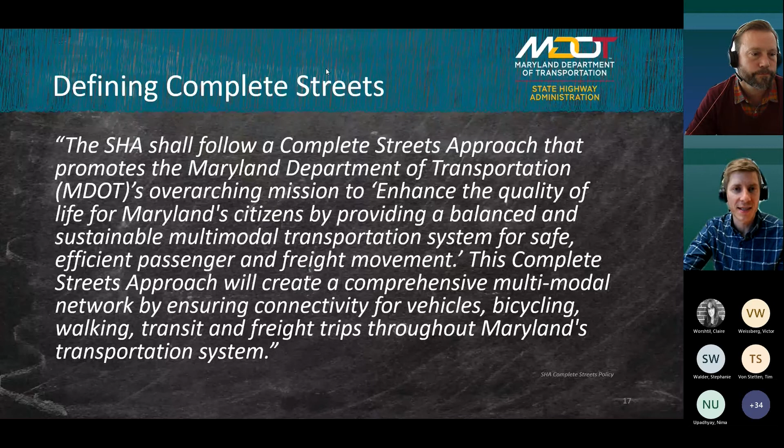Moving into the Maryland Code here, maybe because this is a little more legalistic, has a lot more exceptions and wiggle room. A complete streets policy adopted in accordance with this section shall, there's the strong language again, be implemented with the objective of creating a comprehensive, integrated, and connected transportation network that allows users to choose among different modes of transportation. So that's great, but not specifying which modes of transportation. Ensure that all users are considered during the planning, design, construction, and reconstruction phases of facility. So really nice that they specified the activities, but 'are considered' is not as strong as the specific actions that will be taken for those users.

Benefit all users equitably to the extent feasible while taking into consideration the needs of the most underinvested and underserved communities. That's a great equity piece.

When practicable, require the accommodation of other modes of transportation. That 'when practicable' is a big out that allows some wiggle room. 'Extent feasible' in the prior one was too—sorry, just wanted to pull that out. Yep, thanks for keeping me honest. Recognize that all facilities are different and user needs should be balanced to ensure community enhancement. That is some helpful flexibility.

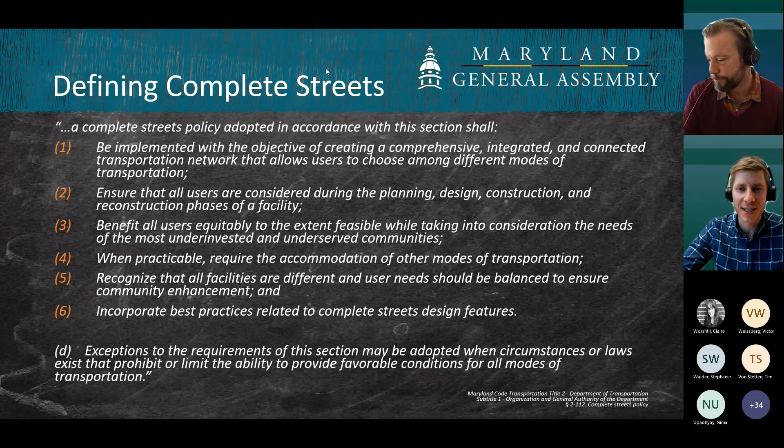And then incorporate best practices related to complete streets design features. This is not the entire section, but this is the key language. At the bottom, note that exceptions may be adopted when circumstances or laws exist. So certainly laws are important—you can't do anything that's not legal—but circumstances are pretty open to interpretation. So this leaves a lot of flexibility and wiggle room too.

Getting a little more local, this is the Plan 2035 Prince George's. This is the definition of complete streets that was included in that 2014 document. I won't read this entire one out loud, but this is a bit more descriptive about what complete streets are, and not specific to how they should be implemented, but does include a lot of the key elements: sidewalks, bike lanes, special bus lanes, giving lots of illustrative examples of what a complete street can be.

And then getting a little more specific still, the Prince George's County Code requires that all planned, county-financed, and approved road, sidewalk, trail, and transit related construction and reconstruction projects shall include environmental, site design, and facilities for the combined use of motor, emergency, and freight vehicles, transit, bicycles, and pedestrians. So once again, very strong—shall include these facilities—and specifies specifically the users that are to be accommodated.

But as we continue, here are those exceptions again. Except when cost shall be disproportionate to the projected need, or when such facilities would be inappropriate due to the nature of the project, including the context and character of the surrounding built and natural environment of the neighborhood or area. So again, here's some of that language that gives some wiggle room.

Matthew, I don't know if you had any other thoughts on that. No, I think the point from earlier is just this sort of reinforces it. Okay, thanks.

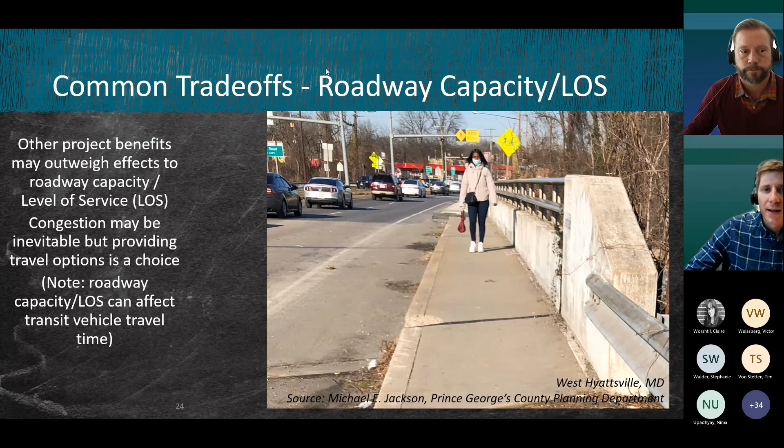Also thinking about person mobility: level of service typically measures how well cars can move along corridors and intersections, but it's also important to think about person mobility and the trade-offs in providing space for pedestrians to navigate intersections and roadways. This often becomes an issue when repurposing travel lanes, reconfiguring intersections, or even adjusting signal operations.

Signal operations are often optimized to reduce vehicle delay as much as possible, but it's important to also think about the other users at the intersection and consider total person delay, not just total vehicular delay.

That can be a useful argument when thinking about whether data on the users of the facility can help make these changes, or whether there's a more policy-driven argument that pedestrians simply need to be accommodated comfortably at the intersection as a matter of course.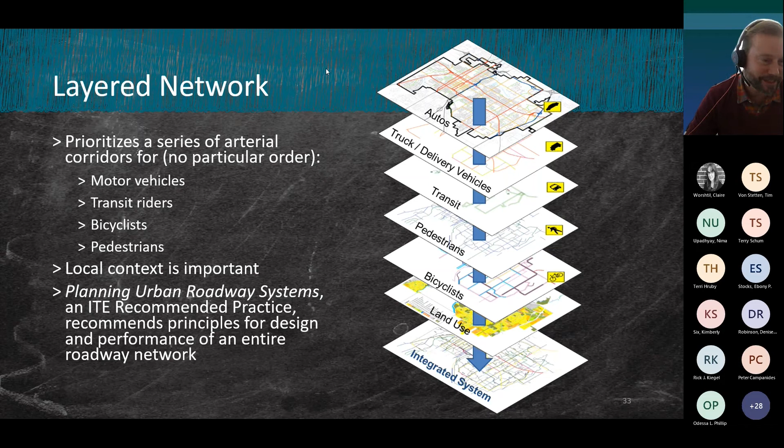I do want to make a point that Michael made with me, which I appreciate, which is just that you shouldn't use layered networks as an opportunity not to accommodate all modes. There is a need to accommodate all modes on all streets. It's really just about point of emphasis, or maybe even sort of tiebreakers in terms of which modes get the highest accommodation given different contexts.

So I'll walk through an example in Westminster, California, and there's a series of these slides. The key thing to look at is that there is a street, and what we're showing here is the bicycle and pedestrian priority network. So this is just one layer. All the green facilities are the bike and ped priority areas. There's a street going north-south, right in the center of this page, and you can see that it has bike and ped accommodations on it.

And Alex, if you go to the next slide, you can see that same street does not have automobile priority accommodations. That is, the automobile priority is accomplished on the two parallel streets on the east and west of it. And so that's a good example of, is there a comment or question?

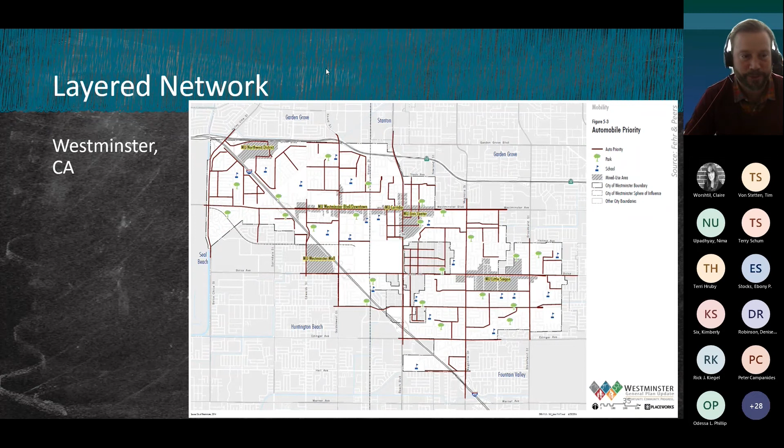That's a good example of separating modes. And then it allows you to build essentially world-class facilities for bikes and peds on that bike ped street, and presumably accommodate auto movements more efficiently on the adjacent streets as well.

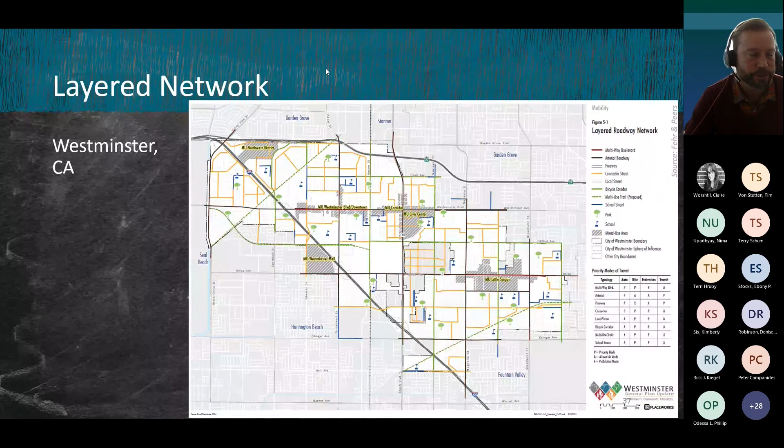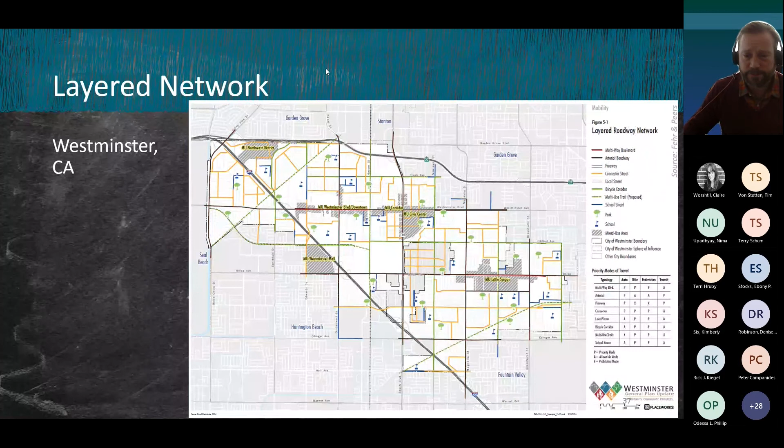And then I think the other piece of this that Alex will get into later is doing an analysis of how the recommended improvements affect those modes. So one of the really great things about being specific around modal priorities is that it allows you to sync up your performance measures. So if you have a street that is a transit priority street, then your performance measures for assessing how that street is performing should be based on transit criteria, things like level of amenities, or maybe transit travel times and reliability, but it allows you to sync those things up.

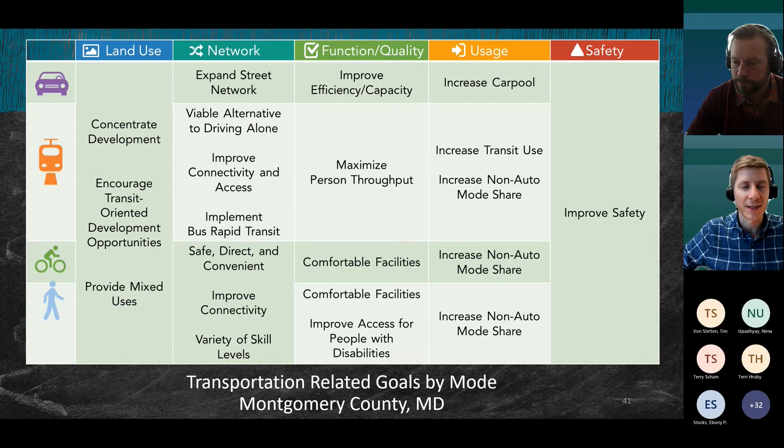So we took a lot of the goals and objectives stated in some of their existing planning documents and arrayed them on a matrix, with modes down the left side: vehicle, transit, bicycle, and pedestrian. And across the top, the different elements of a transportation network: land use and context, the network itself and how it's connected, the function and quality of how it's performing and the user experience, the level of use, and safety as an important consideration.

As we went through their planning documents and noted the kinds of goals and objectives they had, we found a pretty comprehensive set of goals across all of these modes and all of these functions.

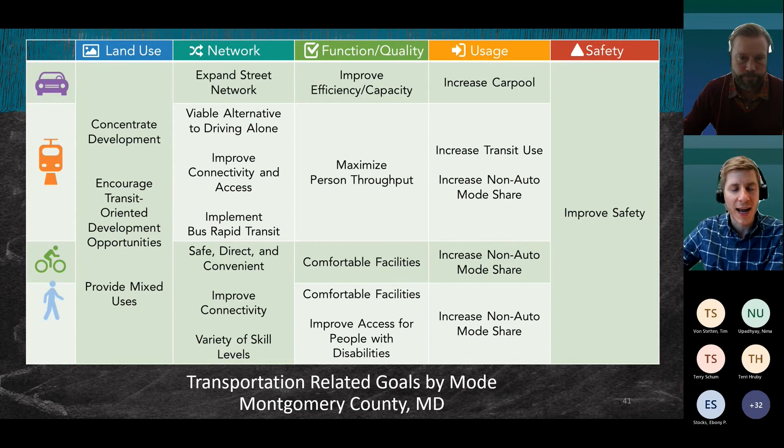For auto, most of their measures performed pretty well. They didn't really have anything to talk about vehicle network connectivity, although generally in most places in the United States today, there's pretty good auto network connectivity to just about anywhere you want to go.

But for the other modes, for transit, bicycle, and pedestrian, the metrics did not perform as well. So we went back to the drawing board and thought about the different metrics we could use that would address each of these intersections of the transportation network functions and then also the modes.

That resulted in four broad categories: accessibility, traveler experience, intersection performance, and activity. This required a little bit of realignment, but then we identified measures that addressed all of those.

So thinking about accessibility to different locations, jobs, overall person trips, and looking at those by mode - auto, transit, bicycle and pedestrian - how long those trips took and how easily you could access the transit system itself. Traveler experience covers the frequency and span of transit service, how reliable the vehicular network was, and then bicyclist and pedestrian comfort, which I'll go into in more detail in a moment.

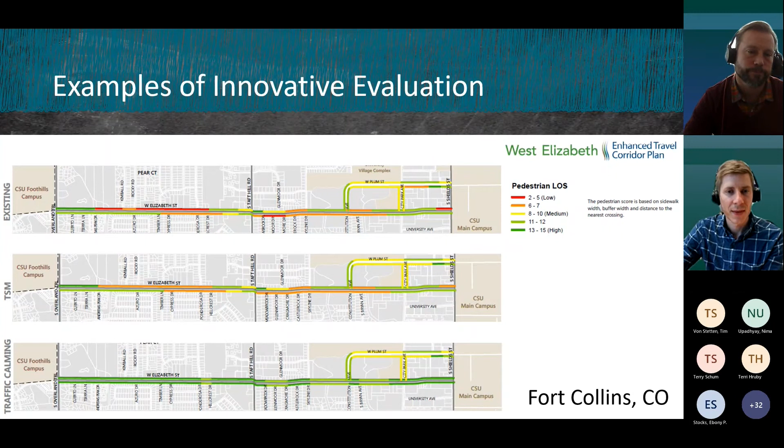One other example I wanted to share was just thinking about any of these performance measures and the way that they affect different groups differently.

And so we used that concept to compare outcomes for folks who were living in these areas of concentrated low income and minority population versus other locations that don't have those concentrations, and did find that residents who were living in those equity emphasis areas would be exposed to much more congested vehicle miles of travel, and along with that comes poorer air quality and increased exposure to collisions. Residents of those locations would experience much more exposure than those living in the non-equity emphasis areas.

So this kind of stratification can be done with just about any performance measure that has a spatial component, so anything that could be divided by a traffic analysis zone or other census geography, to see how those outcomes would affect different groups.

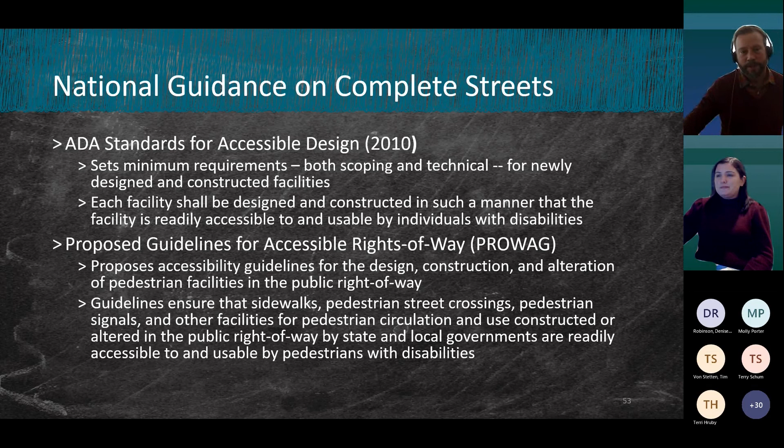The most recent evolution relative to Maryland and Prince George's County is what SHA is doing. This year they published Context Driven, sort of SHA's shot at something akin to what Florida had, defining what contexts are and what types of treatments are appropriate within those contexts. I think it's a huge step forward - it's a great document and website, so I'd recommend you take a look at it.

In parallel to that, they're doing a Pedestrian Safety Action Plan, which was just published. The first priority list of action locations was published just a month or two ago - great progress. And like the Florida guide, it's a little more visual. If you go to the next slide, it has different context zones all the way from urban center to rural.

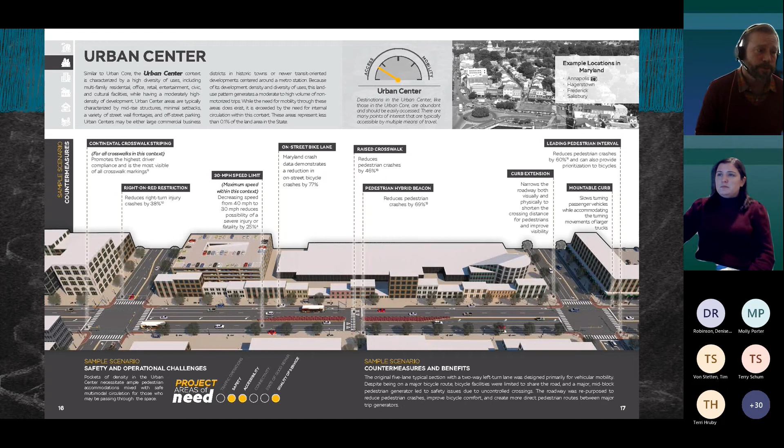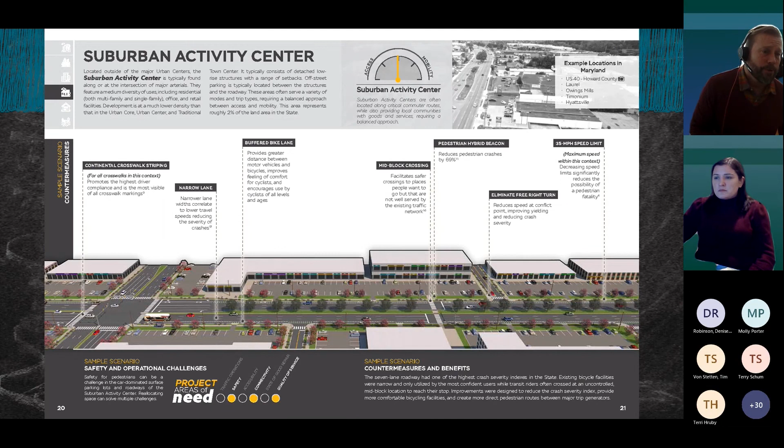You'll note the number of callout boxes for special accommodations, whether for bikes, peds, transit, or streetscape environment - there are a lot more callouts for those treatments in urban centers. As you step closer into more auto-centric areas, the number of those accommodations goes down. It's really helpful for level-setting on what types of treatments should be present in each context. SHA is also doing its first application of this.

So we've been working with RK&K, who's also part of this team, on developing the Maryland 185 and 187 context definitions, applying context-driven design to those corridors. I'll describe 185 to you, which is Connecticut Avenue north of Chevy Chase Circle.

That section is 6 lanes wide with a small median, and the lanes are 9.5 feet wide. One key thing we've tried to figure out is how to best apply context-driven design. We really relied on crash data to help us decide whether to reconfigure that, and developed a recommendation of converting that 6-lane section to a 5-lane section with buffered bike lanes, driven by the strong history of rear-end and right-angle collisions, both a product of not having protected left turn pockets along most of the corridor, which makes people make ill-advised decisions about when to turn, and other vehicles stopping in the through lane trying to turn, with others smashing into their back.

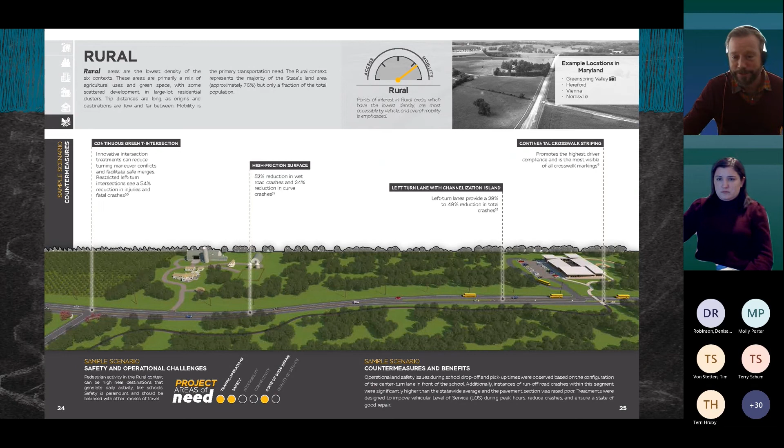So I think Maryland is in a great spot in terms of a lot of progress of late, but still finding its legs in terms of how to best apply all these new tools. But it's an exciting time in Maryland. So that's the historical concept construct. With that, I'll turn it over to Anjali, who's going to talk first about pedestrians.

Yeah, thanks, Matthew. So we're going to start getting into some roadway design concepts. In this section, we'll cover design parameters by mode, and we'll talk about roadway design as well as intersection design and different types of intersection control treatments. Later on, Alex and Matthew will go into detail on streetscape design and curbside management.

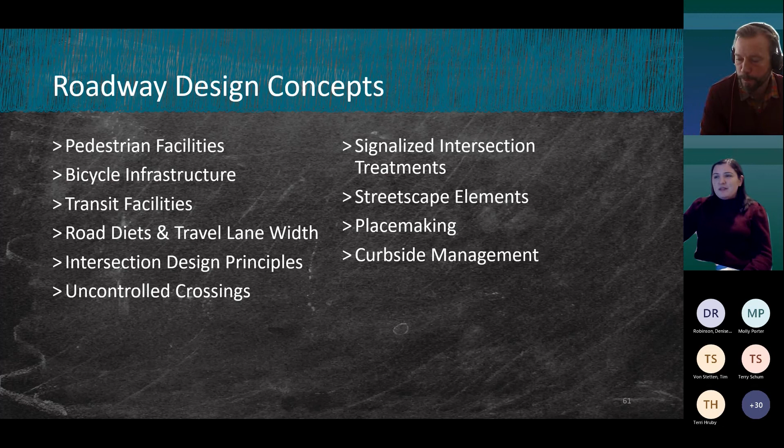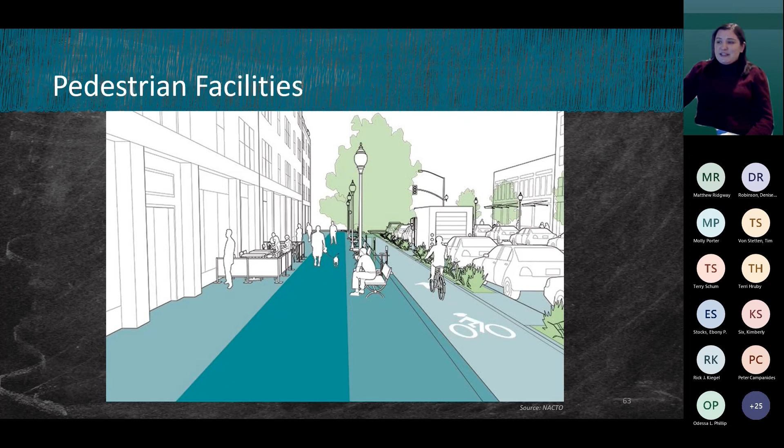It's important to note that DPW&T does have specifications for pedestrian facilities within the county. Design width is defined as extending from the curb or planting strip to any buildings or landscaping that form the opposite borders of the sidewalk. DPW&T specifies about a 5-foot minimum sidewalk width along arterial, collector, and industrial roadways.

The minimum clearance width is the narrowest point on the sidewalk, and this inaccessible minimum width is created when obstacles like utility poles protrude into the sidewalk and reduce the design width. Larger design widths can accommodate more pedestrians and therefore improve ease of access.

There are also specifications on maximum grade, defined as a limited section of path that exceeds the average grade. In the pedestrian environment, the maximum grade could be measured over 2-foot intervals, which is the approximate length of a wheelchair wheelbase or a single walking pace.

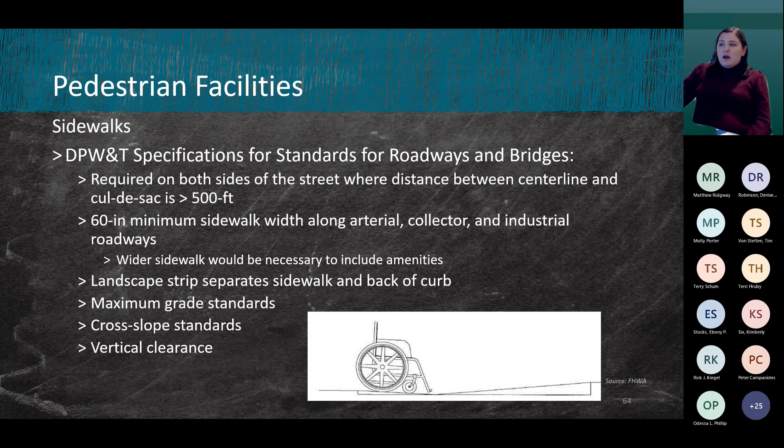Next, DPW&T's Urban Street Design Standards apply in more dense and urban areas of the county. This guide specifies a minimum sidewalk width of 8 feet, although the minimum can vary depending on the scale of development and street typology, keeping in mind that greater widths provide greater accessibility. When designing these facilities, street furniture, signs, utilities, and poles should all be placed outside of the clear width zone of a sidewalk, and the minimum width may not be enough to satisfy actual need, so additional width might be necessary to improve comfort for pedestrians.

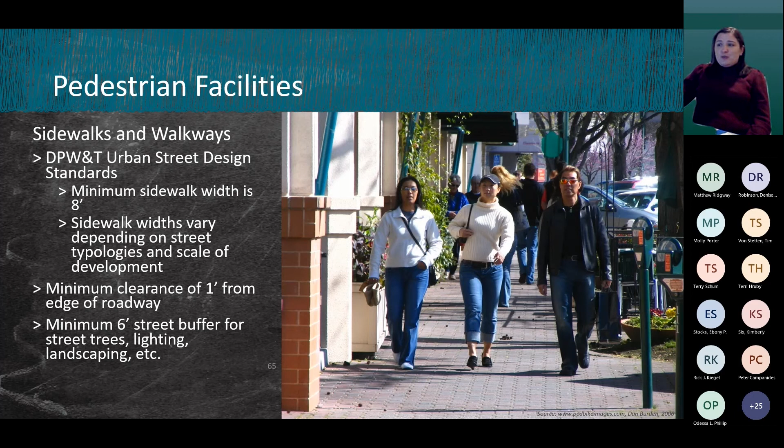Moving on to bicyclists and bicycle infrastructure. It's important to remember that bicyclists generally have the same rights and duties as motorists, which means designing for them is similar and based on the same fundamentals of transportation engineering. Some differences are that bicyclists have lower speeds and acceleration capabilities, and greater sensitivity to direction of travel and steep uphill grades.

Generally, bicycle travel can be enhanced by bikeways or improvements to the right-hand portion of roadways where bicyclists are required to travel, and when feasible, providing a wider shoulder than the minimum width can be considered. Bicycle travel can also be enhanced with appropriate signage and short-term and long-term parking facilities.

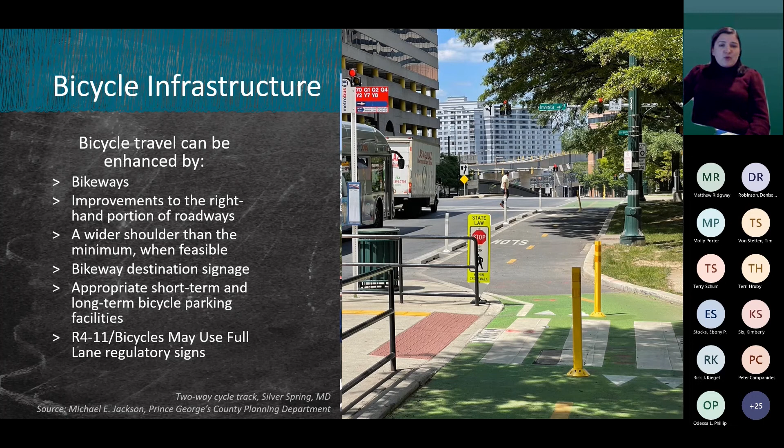Thinking more about bicycle parking, short-term bike parking can be convenient and easy to use, while long-term bike parking should emphasize secure and sheltered access. When designating space for bike parking, you want to consider the locations, the security, the quantity, and the density.

Next, looking at local parking requirements: Prince George's County does have requirements for bicycle parking that specify the number of spaces required and provide high-level guidance on design. It's important to note that new requirements are scheduled to go into effect in April of next year that include more detailed space requirements depending on land use, and more detailed bike rack and locker requirements as well.

Getting into the design of different facility types for bicycle infrastructure, first we have the bike path. When designing a separated bike path, design considerations should include exclusive use by bicyclists and in some cases pedestrians. If regular pedestrian use is anticipated, separate facilities for pedestrians might be beneficial to minimize conflicts, so it's important to understand whether there's opportunity for a separate facility or not.

It's important to remember that sidewalks are not considered bike paths, but where you're providing a bike path with no adjacent adequate pedestrian facility, and the bike path will be available for pedestrians, that means the facility should also meet ADA design criteria. The minimum paved width for a two-way bike path is 8 feet, although 10 feet is preferred. For a one-way bike path, the minimum width is 5 feet. Design speed is generally about 20 miles per hour, except where there are long stretches of downgrade, in which case the design speed should be 30 miles per hour.

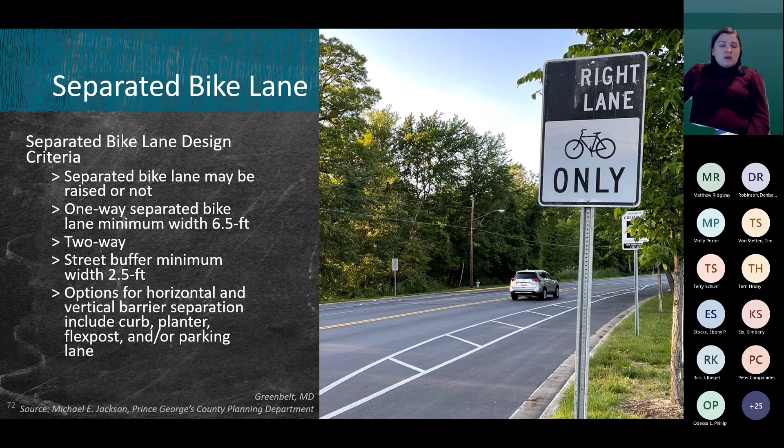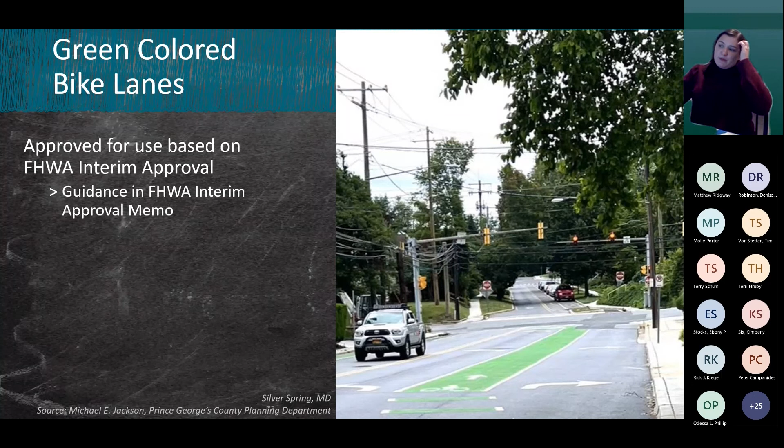If we go to the next slide, we can talk about green paint. The use of green paint or green colored bike lanes is shown here in the image from Silver Spring, and has been approved for use in the county based on FHWA's interim approval. The next slide shows green paint being used for conflict area markings and colored pavement in conflict areas. Another example here from Silver Spring has been shown to increase awareness and drivers yielding to bicyclists, so increased safety.

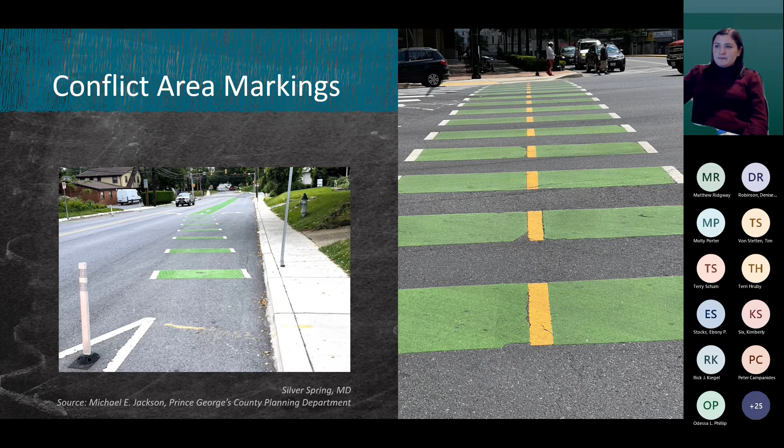Our next facility type is a bike route, and bike routes are intended to provide continuity to the bikeway system. They're typically established along through routes that are not served by bike paths or bike lanes, and they're used to connect discontinuous segments of bikeway or discontinuous segments of bike lanes. The facilities are shared with motor vehicles on the street, which are established by placing bike route signage along the roadways, and sometimes shared roadway markings are provided along the route in the street.

Since bicyclists are permitted on all highways, the decision to designate the route as a bikeway should be based on the advisability of encouraging bicycle travel on the route and other factors.

Routes should only be signed if they provide for through and direct travel in bicycle demand corridors, if they connect discontinuous segments of bike lanes, or they provide the appropriate assignment of right-of-way at intersections to give priority to bicyclists. It's important to remember that the maintenance of a bike route will be at a higher standard than that of other comparable streets.

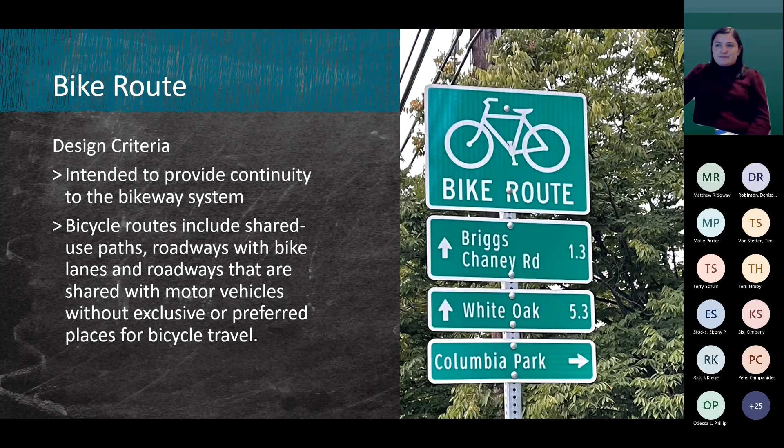On the next slide, we talk about shared lane markings, and these are used to guide bicyclists on where to ride. They can help to avoid doorings by specifying where the bicyclist should be in the lane, and they remind drivers that bikes belong.

The shared lane marking should not be used on roadways that have a speed limit above 35 miles per hour. There are, of course, exceptions where there is bicycle travel and there's no marked bike lane or shared use path, or the right-hand traffic lane is too narrow to allow vehicles to safely pass bicyclists. They should not be used in shoulders or designated bike lanes.

Our next facility type is a bike boulevard. NACTO defines a bike boulevard as a street with low vehicle volumes and speeds, designated and designed to give bicyclists a travel priority. They're basically a collection of treatments that work to achieve the goal of providing a facility that is safe and comfortable for all cycling abilities, through a combination of volume management and speed management treatments.

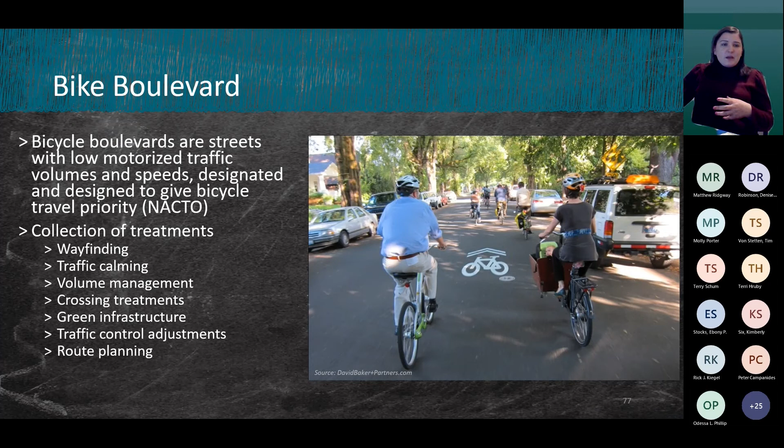On the next slide, some of the design considerations for a bike boulevard include using traffic volume management to get vehicular volumes below 3,000 vehicles per day, and using traffic calming to get speeds below 25 miles per hour. This also means evaluating traffic controls to minimize delay, providing enhanced crossings at busy streets, providing good wayfinding through signage and markings, and working with emergency responders if any speed management includes speed humps or anything like that.

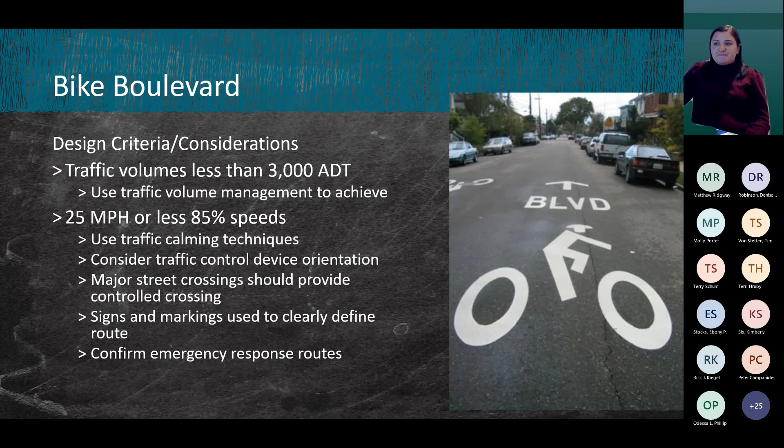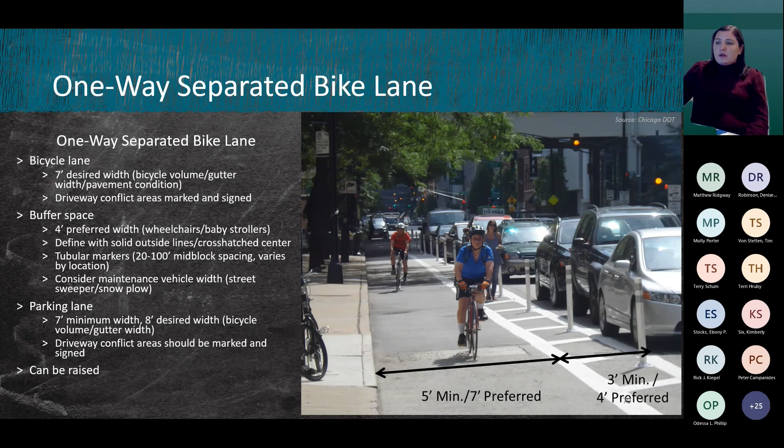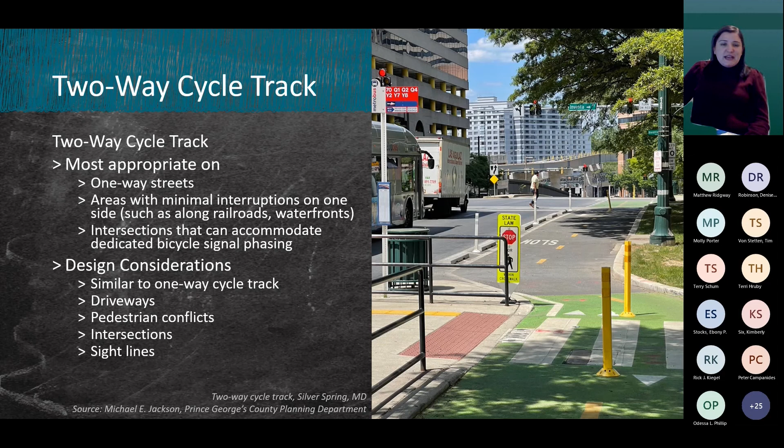Getting into some of the details of the design, the picture on the right shows this. We saw this photo earlier from Silver Spring, but this is an example of an existing two-way cycle track. At a minimum, a two-way cycle track should be 8 feet wide, while 12 feet is preferred. You want to use a dashed yellow center line to separate the bike traffic and define it as two-way. Ideally, a 4-foot buffer is provided, particularly where the facility is parking protected, and also uses raised flex posts for physical separation. Design should also implement enhanced treatments at any conflict areas like driveways.

An important consideration in designing a two-way cycle track is whether drivers and pedestrians are familiar with the facility and know to expect two-way bicycle traffic at conflict points, so that those enhanced treatments like signage and colored paint can be useful.

I mentioned the smaller footprint of a two-way cycle track, and you can think about that with a one-way bike lane. Say you have a one-way separated bike lane that designates 7 feet for the bike and a 4-foot buffer on either side of the street for a total of 22 feet in its footprint, compared to a two-way facility that provides 12 feet for the bike lane and a 4-foot buffer for a total of 16 feet. So there's that difference of 6 feet between the two options in terms of the footprint.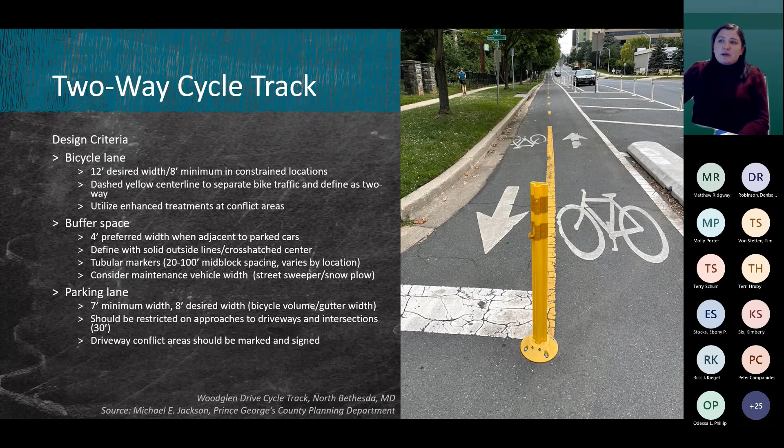Our next slide talks about contraflow bike lanes. Contraflow bike lanes designate a facility to travel in the opposite direction of the vehicle traffic. They work best on low volume residential streets with familiar drivers. This slide shows an example from Silver Spring, and you can notice the use of the double yellow to separate vehicular and bike traffic.

Important design considerations include providing a wider bike lane facility adjacent to parked vehicles and using shared lane markings in the direction of vehicular flow, where you don't have the width to have a bike lane on the other side of the street. Other design considerations include traffic diverters, which can help to either restrict vehicles or reduce the volumes when needed.

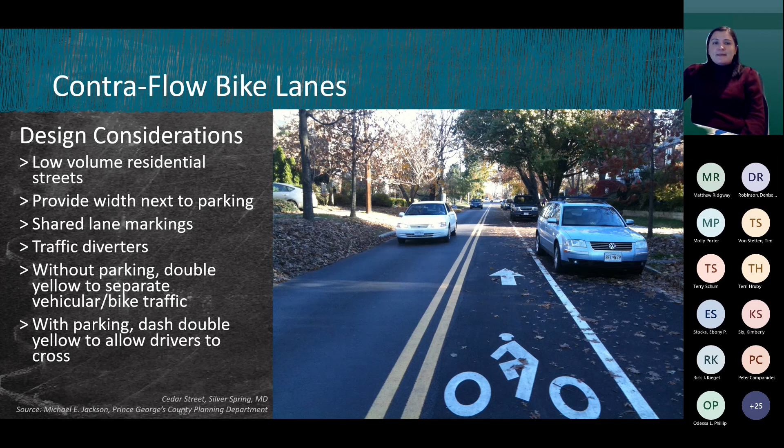On the next slide, we talk about our next facility type, which is a left side bike lane. In some cases, it's appropriate to consider bike lanes on the left side of the roadway when you have a one-way street or places with frequent bus stops or higher right turn vehicle volumes. Instances where having bicyclists on the left side could lower the risk of dooring. These are designed as conventional bike lanes with the same design guidance, just located on the left side of the roadway.

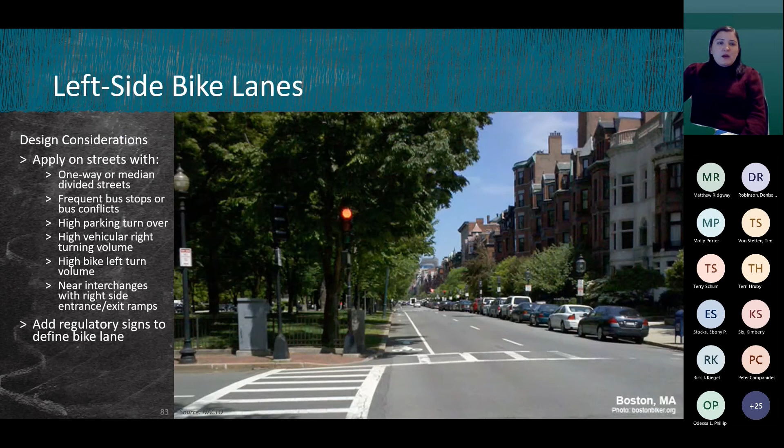On the next couple of slides, we get into some experimental designs. The photo here is of an enhanced shared lane marking, which is currently an experimental design and still needs a formal request for experimental status. FHWA will accept requests to experiment where an agency desires to deploy these for the first time. You should also consult the Maryland MUTCD for additional information on experimental traffic control devices.

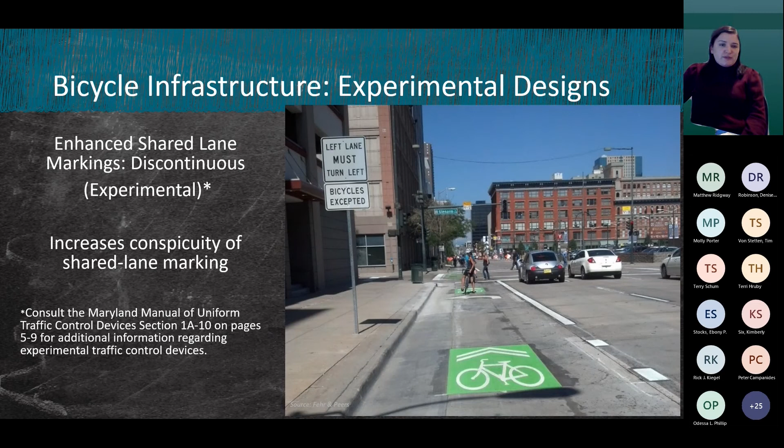On the next slide, we talk about bike boxes, which are being implemented in Maryland. You're seeing a photo here from downtown Silver Spring. They have been granted interim approval by FHWA, and they allow bicyclists to get ahead of traffic during the red signal phase. They do require a no right turn on red signage. You can see that here in the photo, and the green pavement is optional.

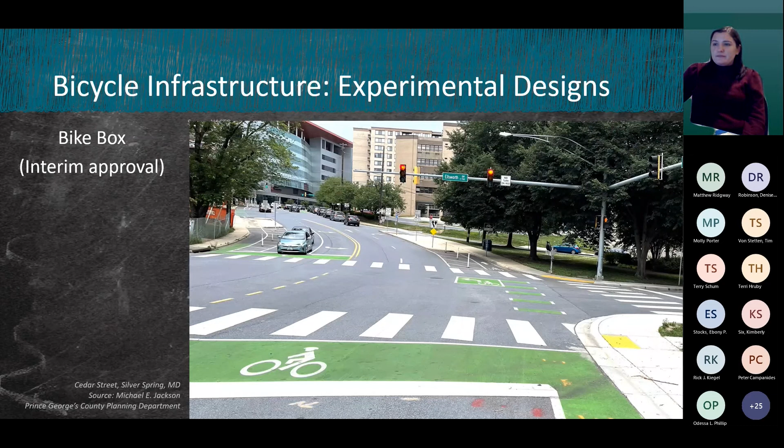The next slide talks about two-stage turn queue boxes, which have also been granted interim approval by FHWA. These require both the arrow and the bike stencil when placing them on the pavement. Similar to bike boxes, they do require the no right turn on red signage, and the green pavement is optional.

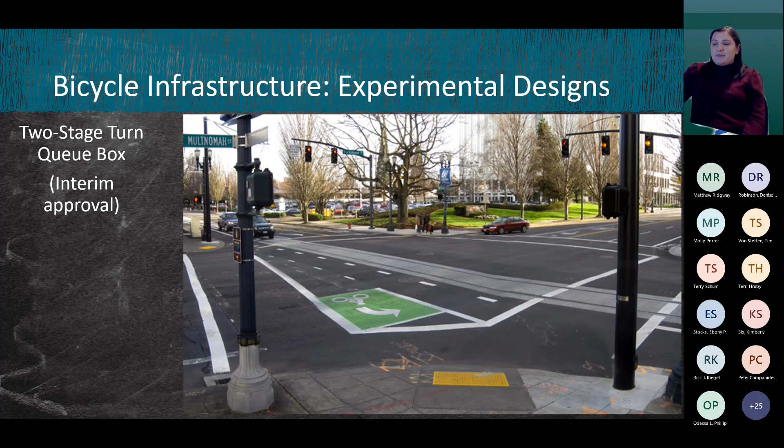So that takes us through our bicycle facilities, and next up we'll get into design of our transit facilities.

At a high level, design for transit facilities should cover 4 areas. The facility type, so some examples could include an exclusive right-of-way for something like bus rapid transit or BRT, or preferential treatment. Is there going to be transit-oriented signal timing provided on the corridor?

You also want to consider the bus zone length. One bus could require anywhere between 80 to 160 feet in length. So how many buses are you planning for in your bus zone?

Thinking about the platform geometry, typically a flat concrete pad adjacent to the roadway is provided at least 8 feet deep and 10 feet long. The platform should be able to accommodate a passenger shelter, benches, or other facilities without interfering with the pedestrian throughway on the sidewalk.

You also want to consider accessibility when designing transit facilities. Considering the curb height could be between 6 to 9 inches. If too high, a bus would be prevented from moving close to the curb and wheelchair lift operations could be impeded. And if too low or without a curb at all, elderly or mobility impaired passengers with strollers might have difficulty boarding and alighting.

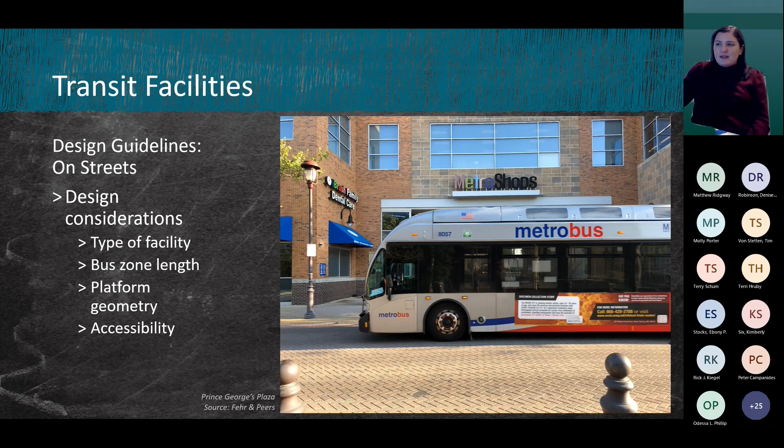Getting into some more of the details in designing transit facilities, selecting the type of application. For example, are you in a situation with high standard, high speed, 40 to 50 mile per hour multi-lane suburban roads, generally with limited access? Or are you in an environment with lower speeds, shorter blocks, and more urban streets generally found in or around centers of concentrated employment like CBD, central business districts.

You want to balance the sometimes competing requirements in these cases, including considerations for overall road efficiency and moving people, the transit operational and passenger needs, requirements for street front commercial and residential users, frequency and spacing of cross streets and traffic signals. So considerations for the alignment, frequency, span of service, and intersection treatments help achieve all the requirements for an ideal transit facility.

It's also important to consider the interaction between all the modes in the design of transit facilities. Some of those design considerations should include passenger information, how you're disseminating information to passengers in terms of real-time arrival information, as an example. What is the pedestrian access like? Are you providing bicycle parking? And what sort of fare collection system are you going to have?

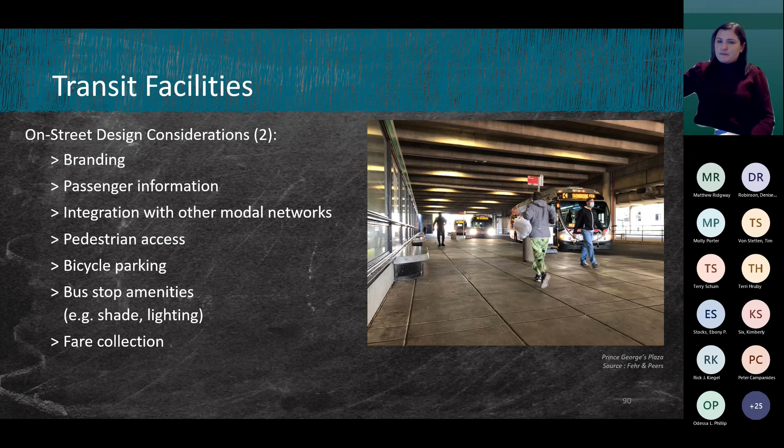There are also many trade-offs to balance in selecting bus stop location between near side or far side, right lane versus left lane. We'll discuss a few of the options, and the guide for geometric design of transit facilities on highways and streets from AASHTO is another great resource.

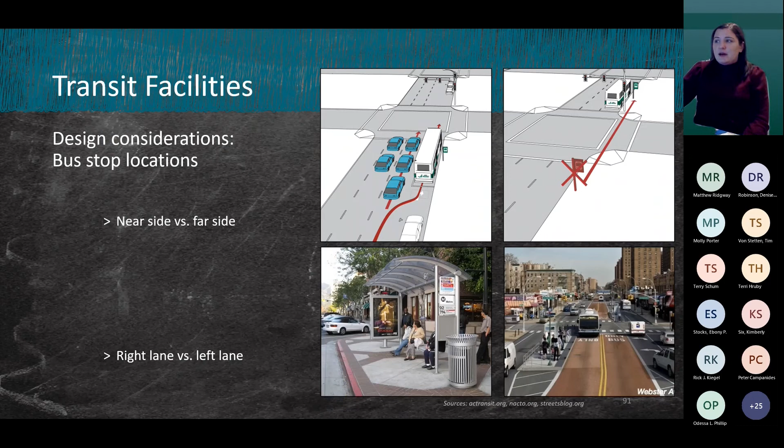First, prioritizing near side bus stop locations can have advantages such as minimizing interferences when traffic is heavy on the far side. It allows pedestrians to access buses closest to the crosswalk, could eliminate the potential of double stopping, getting through the light and waiting at the red light, getting through and then stopping on the far side. And it could also allow passengers to board and alight while the bus is stopped at the red light.

Some disadvantages of near side locations could include increasing conflicts with right turning vehicles, could block the through lane if trying to get over, and could increase sight distance problems for crossing pedestrians.

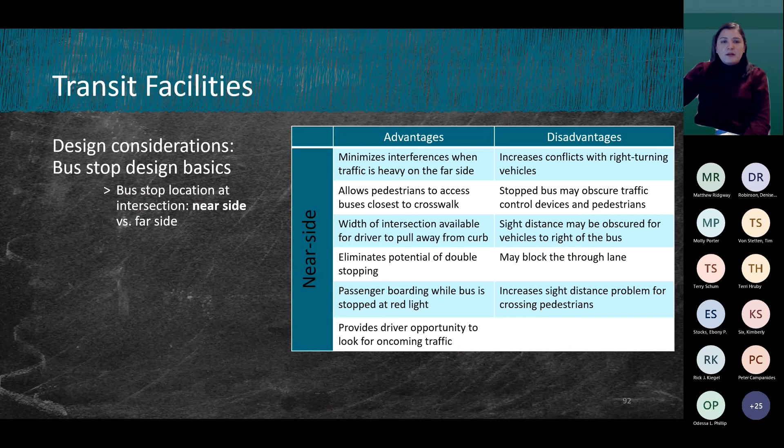On the other hand, thinking about far side bus stop locations, some of the advantages include providing additional right turn capacity, minimizing sight distance problems, encouraging pedestrians to cross behind the bus, and allowing bus drivers to take advantage of gaps in traffic flow created at traffic signal locations.

Some of the disadvantages could include the stopped bus blocking the intersection. We may increase sight distance problems for crossing pedestrians, could cause the bus to stop on the far side. Again, you could have that double stopping situation, and it could result in traffic queued into the intersection when buses stopped in a travel lane.

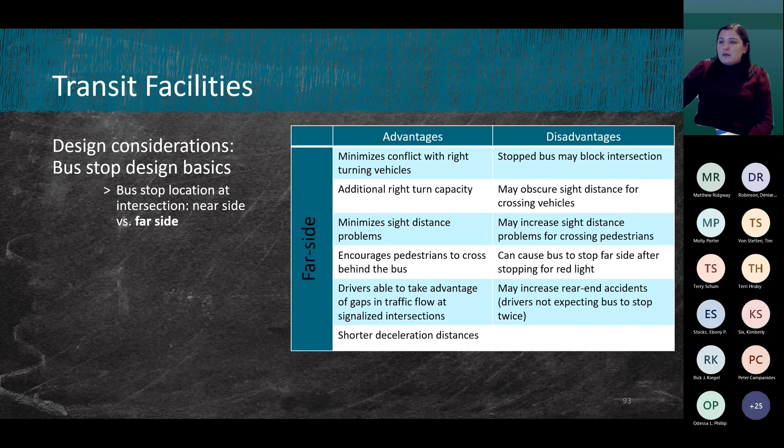So from here, we've been able to take our design parameters mode by mode, and then I'll turn it back over to Alex to take us through some principles at the intersection.

Great, thanks, Anjali. Yeah, I'm just going to kick off the intersection design piece with some high-level principles, and then I'm hoping folks are still with us, I'm going to try to ask for a little bit of audience participation and talk through an example of an intersection and some challenges and potential improvements for it. So I'll be doing that in a few minutes.

Just starting off, some high-level complete intersections guiding principles, things to consider when you're considering complete streets in the design of an intersection. First of all, just observing the operation of the intersection. How is it currently being used? And perhaps more important than how it's currently being used is maybe how is it not currently being used, and other reasons for that.

Considering all user groups at the intersection and whether they can currently be accommodated. Pedestrians and bicyclists will be there, even if not as prevalent, or not present while you're observing. It's a good idea to meet basic pedestrian and bicycle mobility and safety needs at all intersections, rather than assuming they won't use the facility, because if their needs aren't met, that guarantees they won't use it. It's important to consider the reason for their absence if they're not there.

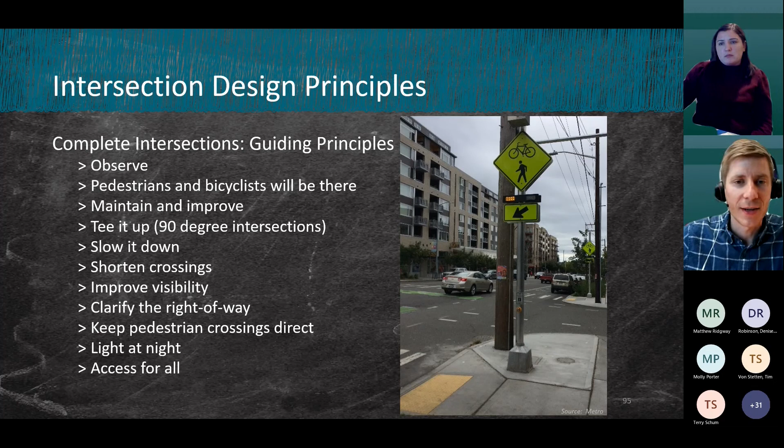A few other things to consider: the volumes and abilities of pedestrians using the facility. Age ranges can be a particular thing to keep in mind, since older pedestrians may have challenges with depth perception, vision, judgment, hearing, and walking speed - so think about the time it takes to clear an intersection as a pedestrian is crossing.

Similarly, consider the volumes and abilities of bicyclists - skill level affects their comfort in bicycle facilities and general roadway design. Think about the characteristics of bicycles when designing facilities, since they have different acceleration and stopping characteristics than vehicles, as well as turning radius, length, and width affecting facility design.

Finally, vehicle and motorist characteristics - the size and maneuverability of motor vehicles, thinking about curb and corner radii and roadway widths, and the motorist's ability to perceive and react to objects and potentially people in the roadway.

Land use context is also important - whether street parking is present, whether transit operates on the facility, and where the intersection is located relative to development density and uses that might introduce additional considerations. Also think about different intersection types: three-leg, skewed intersections, special cases, and roundabouts.

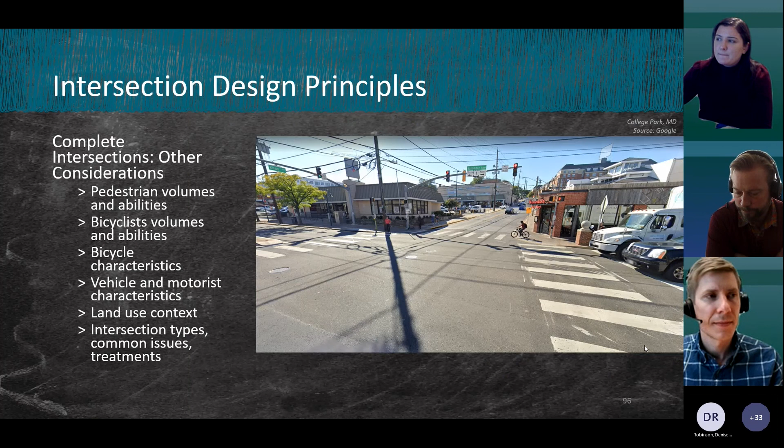I guess for me personally, as a driver, I would prefer when I'm entering the intersection that the bus is to my right rather than my left. I understand there are pros and cons, but for me the biggest con is that the bus affects my sight distance. This is also true in my neighborhood when cars are parked on the street and I'm coming out of my driveway — I look to my left and there's a car parked there, so I have to go further out into the intersection to get around it. So given all the pros and cons, is there a preferred side where a bus stop should be placed?

Yeah, good question. Anjali, do you want to take that one? I think it really gets down to agency preferences and how they want to balance the advantages and disadvantages. I don't think there's an industry preference between near side or far side, because as you can see from the two slides, the trade-offs are pretty equal between the two options. So it just comes down to the agency's decision on what to emphasize.

Yeah, that's been my experience too. But I think, Glenn, your point about sight distance for pedestrians is one that agencies in highly urbanized areas probably favor a bit more with far side stops, for the reasons you're describing. I think there's some benefit to being consistent, so transit users have some expectation about where to find transit stops. But agencies also want to allow flexibility — if you're going to do a queue jump lane or something else, you might want to consider a different stop location. But for the most urbanized areas, I think most agencies I've seen do prefer far side stops.

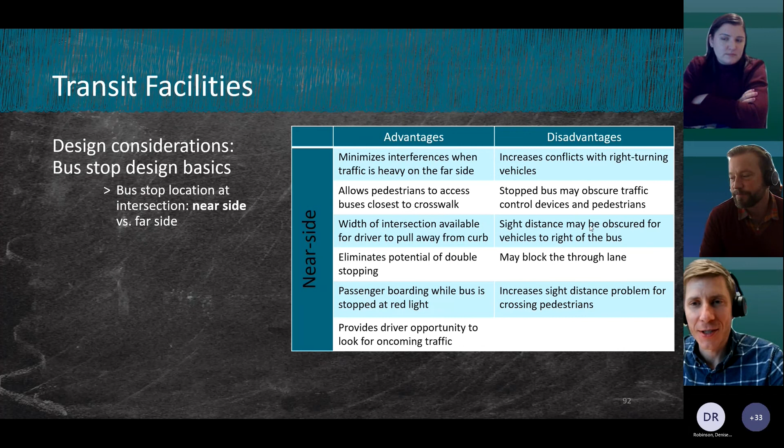Yeah, thank you, that's a helpful perspective. I think a lot of folks call that intuitive design — things being where you expect them to be. Yeah, we would agree, and that's a helpful reminder for me before we jump into that exercise. Are there any other questions or comments from the group on the material we've covered so far? I think we're doing okay on time.

And if not, I'd love to hear any thoughts about this intersection. Alex, it's Rick Kiegel with RK&K. Hi, Rick. I am not a fan of high-speed right turn lanes. I prefer to bring the right-turning vehicle into the intersection so you control them along with the crosswalks. Yep, that's a great point.

Okay, I guess I'm not going to let that go unchallenged. Can I just respond to that last comment? I know this is not a challenge, I'm sorry. It's the age-old question of trade-offs, safety versus capacity — not an original thought, but in a situation like this, when you have a right turn lane, or in some cases a free right turn, it helps overall capacity because more vehicles can go through the intersection without coming to a complete stop. But as you said, in terms of safety, things tend to be safer when you force people to stop, although that's not universally true. So I guess my question is about trade-offs: how do you decide how much leeway to give to safety versus capacity at the end of the day?

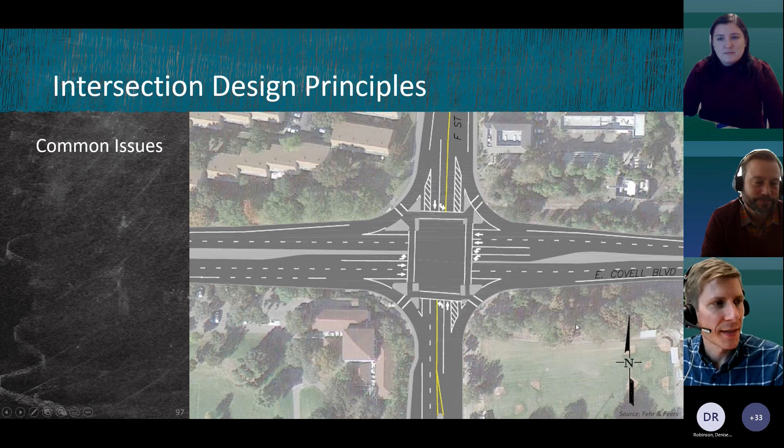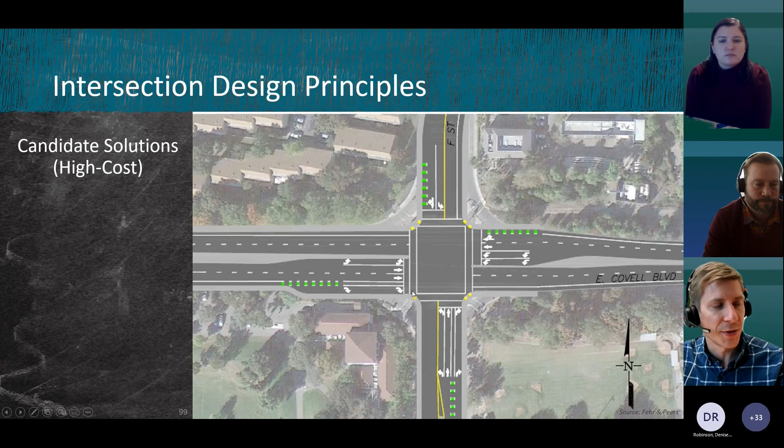This might be more along the lines of what Rick was proposing—these would tend to be higher cost solutions that involve moving the curb and maybe even building out additional curb, but it replaces those free right turn lanes with smaller curb radii that reduce vehicle speed, allowing the vehicle to navigate the conflict between the bicyclist proceeding straight and the vehicle trying to turn right, coming up to a tighter curb radius that requires the vehicle to slow down before making that turn. And again, the advanced stop bars and green conflict markings.

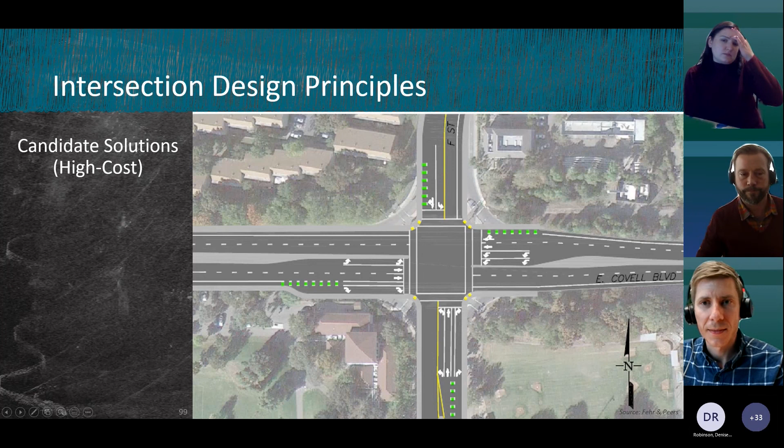One more piece I wanted to throw out there was bulb-outs or curb extensions. The last example was building entirely new curb, but these can be either part of a new design or a retrofit to an existing curb that extends it out into the parking lane or the nearer lane to the curb to help improve visibility. It shortens the pedestrian crossing distances and clarifies and narrows the crossing so pedestrians are only exposed in the piece where they actually interact with vehicles crossing the intersection.

It also helps to tighten the curb radii and encourage safer turning speeds, and creates an opportunity for two curb ramps per corner, which is a big accessibility issue, especially for people with vision impairment—diagonal crossing ramps tend to direct crossing pedestrians out into the middle of the intersection.

If you have two 90-degree faces of the curb that result from the curb extension coming into the crossings, it allows for a directional curb ramp that directs the pedestrian to cross at a 90-degree angle to oncoming traffic. A key consideration is that while it's helpful for the curb extension to bulb out into the parking lane, visibility is still important, so it shouldn't block the view of turning vehicles or infringe on the bicycle lane.

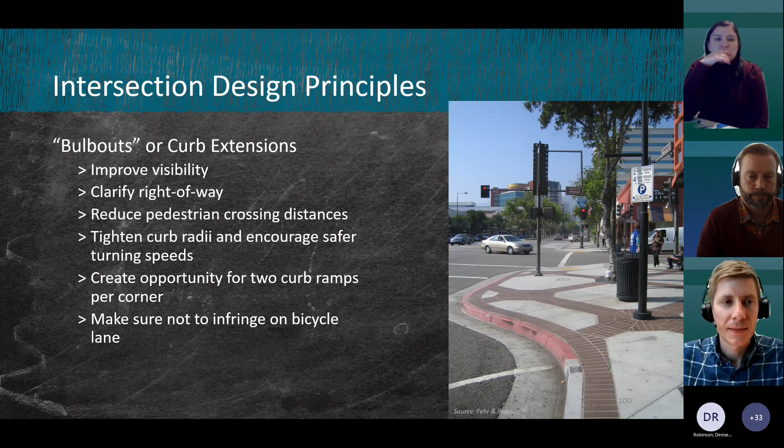So with that, I'll turn it back over to Anjali to talk about uncontrolled crossings.

When designing for uncontrolled crossings, there are a few tools at our disposal. The first is high visibility markings. High visibility crosswalk markings can improve visibility and safety. The longitudinal stripes are more visible to drivers and can also last longer than transverse stripes, especially if they're staggered to avoid vehicle wheel paths, as shown in the top right image.

They are considered appropriate at all crossings and should always be used for mid-block crossings at uncontrolled intersections.

We also have curb extensions, which are sidewalk extensions at intersections that reduce the roadway width from curb to curb, as Alex was just talking through. They shorten the crossing distance for pedestrians and improve sight lines to pedestrians waiting to cross. They also reduce the effective turning radius and turning speed by preventing drivers from cutting diagonally across the shoulder to turn. So they improve safety at uncontrolled crossings by shortening the distance and minimizing the time pedestrians are exposed.

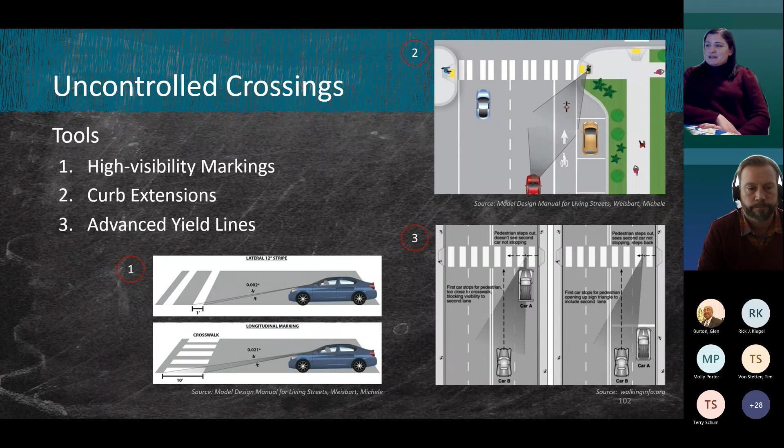The final tool at our disposal is advanced yield lines. Advanced yield or stop lines are standard white stop or yield limit lines, placed 20 to 50 feet in advance of marked or uncontrolled crosswalks. This addresses the multiple threat situation for pedestrians in the crosswalk, which happens when one driver yields and the second driver in the adjacent lane does not. In this instance, both the driver in the second lane and the pedestrian have their line of sight blocked by the first yielding vehicle. This treatment increases the pedestrian's visibility to motorists and reduces the number of vehicles encroaching on the crosswalk.

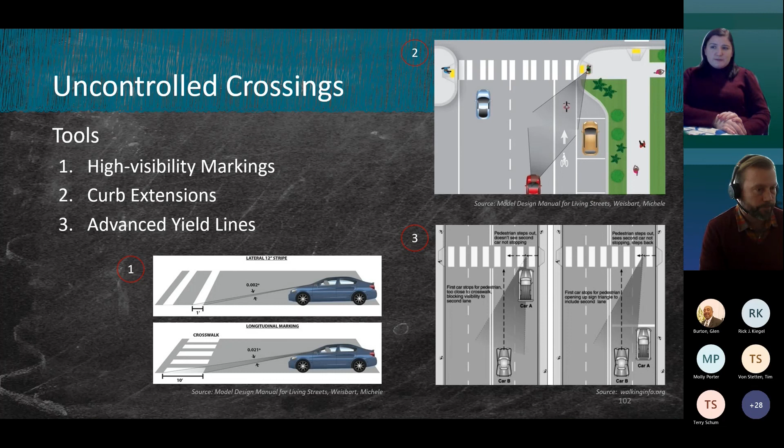At mid-block locations, crosswalks alone are not enough. Additional design interventions can include warning signage, yield lines, raised pedestrian refuge or medians, as shown in this photo, curb extensions, or even enhanced lighting.

There's also the pedestrian hybrid beacon, or HAWK signal, which is effective in reducing pedestrian and vehicle conflicts and slowing traffic speeds. The HAWK signal is a pedestrian actuated signal that combines a beacon, flasher, and a traffic control signal. When activated by a pedestrian push button, it displays a flashing yellow, then a solid yellow, advising motorists to prepare to stop. The signal then displays a solid red and shows pedestrians a walk indication.

During the pedestrian clearance interval, the driver sees a flashing red wigwag pattern until the interval ends and the signal goes dark. The HAWK is useful in areas where it's difficult for pedestrians to find gaps in vehicle traffic to cross safely, and where a normal signal warrant isn't satisfied. It's more appropriate for multi-lane roadways where the benefits of the device can be more fully realized, and it has also received interim approval by FHWA.

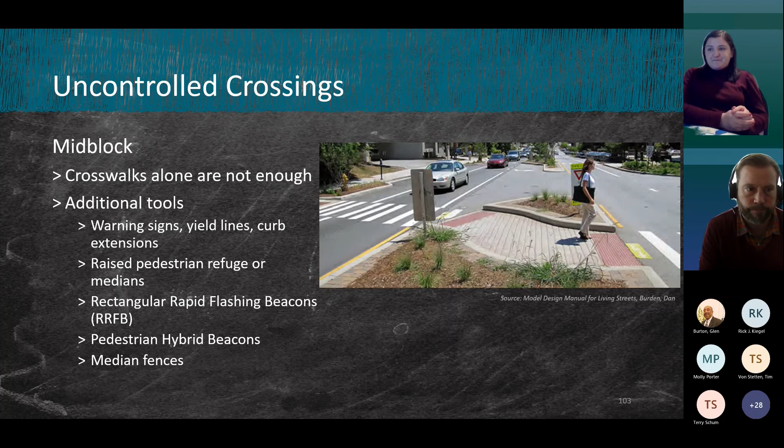And from there, we'll get into signalized intersection treatments, and I'll turn it back over to Matthew.

Thanks, Anjali. Most of this material comes from a publication made by America Walks called Signalized Intersection Enhancements that Benefit Pedestrians. We'll first talk about signal hardware.

We talked earlier about the evolution of practices. For a long time, countdowns were controversial, and there was some difference of opinion about how they should be done. But now there's pretty broad consensus and national mandate that countdowns are part of all new signal installations and signal modifications. There's pretty strong proof that they have safety benefits, not just for pedestrians, but a San Francisco study demonstrated that they also had improved safety outcomes for vehicle traffic.

There's also a movement afoot around turn restriction signs, especially those with time of day sub-banners, which have been found to be pretty ineffective. There's too much information for users to absorb, and it becomes sign clutter. So the idea of blank out signs with LED signs that are not lit when the turn restriction is not in effect, and turned on when it is in effect, has really been shown to take up drivers' awareness and make them much more likely to follow the direction of the blank out signs.

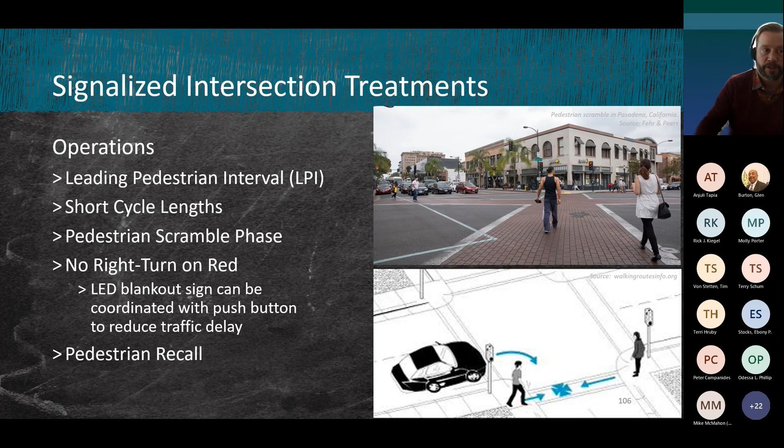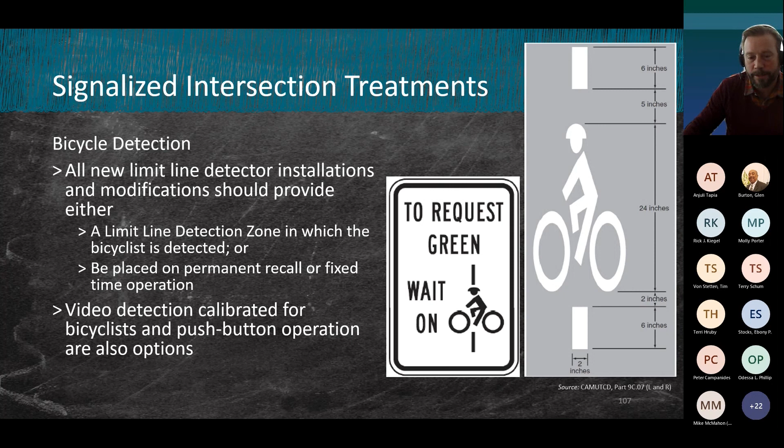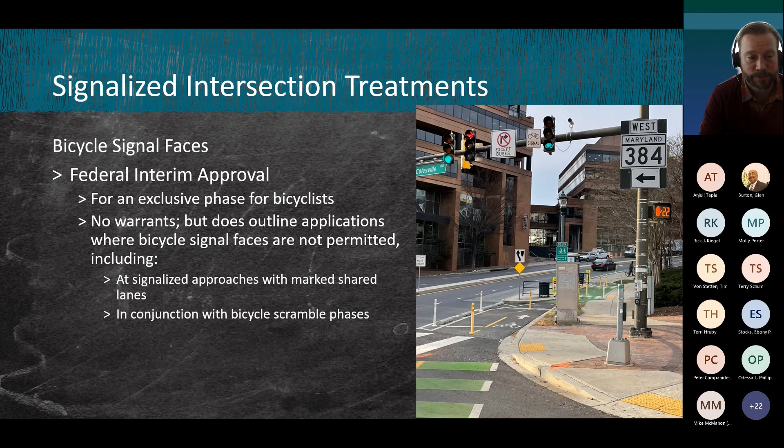Bikes can follow, if they're in the traffic lanes, they generally would follow the vehicular signals. If it's in a multi-use trail environment, off the street, then they would generally follow the pedestrian indications. Both of those are appropriate in many instances, but especially in situations where you're expecting bicyclists to understand a movement like a diagonal, or do something different than what they're sharing with cars in the street or pedestrians on the sidewalk, it's helpful to have a dedicated signal that provides clearer direction for cyclists in those instances.

Then the latest evolution is protected intersections and protected corners. For those who've been practicing as long as I have, this is almost the antithesis of what I was taught coming up through school, which was that as you approach an intersection, the old thought was you really want to make sure bikes and vehicles have clear visibility of one another, so you dash the bike lane and allow the car to merge across if it's turning right. The idea is that everybody can see each other and behave predictably.

What we've learned over time is that scenario is one only a small percentage of cyclists actually feel comfortable riding in, and if we want to expand the number of people comfortable riding, providing protected facilities, both mid-block and more recently through intersections, makes inexperienced, less capable cyclists feel more comfortable choosing to ride a bicycle. So protected intersections are the latest evolution of that.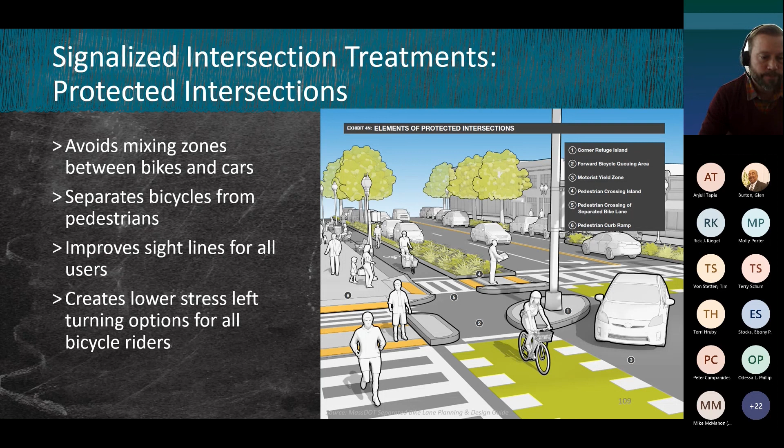So lots of great evolutions here. This is actually from the Massachusetts DOT, so there isn't a national standard on protected intersections yet, but MassDOT, which Toole, part of our team, did write, developed a guide, I think probably five or so years ago, that a lot of people still use as a best practice for many of the more progressive NACTO... I'm sorry, more progressive bike design treatments. There's also another version of AASHTO currently in the works that may include these more formally.

And then there are some design parameters around the spatial elements of protected bike lanes and protected intersections.

In terms of the widths of medians, you want to make sure any medians are long enough for a bike to fit within there, so that the front and rear tires aren't hanging out into the pedestrian environment or into the lanes.

Other areas: making sure that when a vehicle stops and yields to a pedestrian or bicyclist in the crosswalk, it isn't impeding traffic. And the final one is around curb returns, to make sure vehicles really do have to slow down dramatically in order to go around corners in these instances.

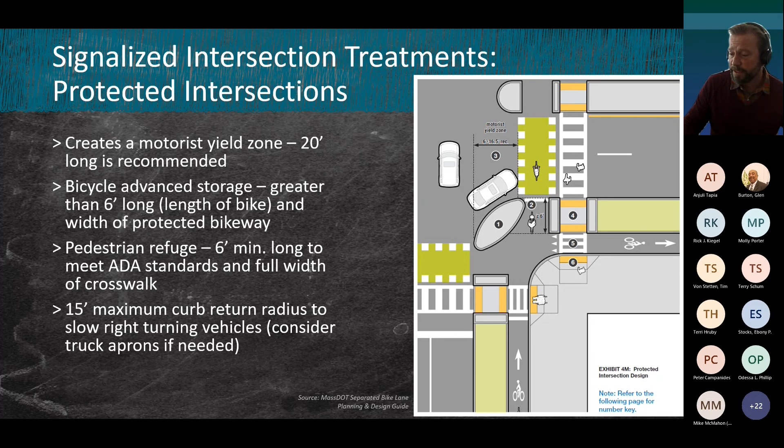The last section, at least for me, is along streetscapes and placemaking. It's pretty short, mostly because we know our lane—we are transportation planners and traffic engineers. We are not landscape architects or urban designers. So we'll talk about these quickly.

There's lots of great progress being made and ideas around making sure that when you design places, you think about it in a comprehensive fashion, almost like you would if you're designing a building or a room. But this is a pretty quick section.

Streetscape refers to urban roadway design and conditions as they impact street users and nearby residents—an important component of public realm. So that's the major concept here: making sure you design these places for people to not just travel through, but also to be.

One of the key measures of public realm in some of the more pivotal analyses, like Better Market Street in San Francisco—I'm from San Francisco, so I have a lot of San Francisco examples—is really observations around how many people interact and hang out as opposed to just travel through. So trying to create places that are comfortable for people to do that, which often relates to things like aesthetic quality, having a sense of place or identity, and then having places to shop and things to look at, beyond just mobility.

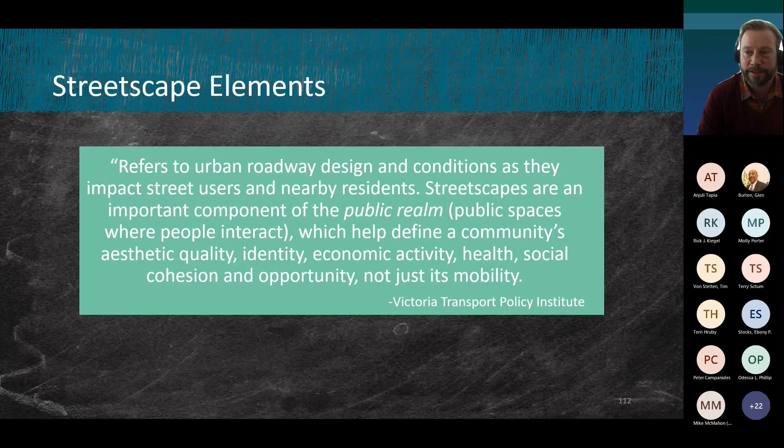There's a number of elements with respect to streetscapes. There's a whole science around the relationship between building height and street width, getting that in proportion to one another in a similar fashion to how you might design a building. It creates a sense of scale, a pedestrian scale that encourages people to walk. There's a whole science around that.

There's also a whole science around signage and marking—some of this is actually pretty interesting. There's some experimentation, not so much in the US but especially in Dutch countries, around removal of signage and pavement markings to create scenarios where users are more cautious because there is some ambiguity. It's the counterpoint to creating predictability—creating a lack of predictability instead, to make everybody more cautious and create a sense that this is a pedestrian priority area. There's also often an emphasis on street trees, lighting, pedestrian-scale furniture, and so forth as part of streetscape projects.

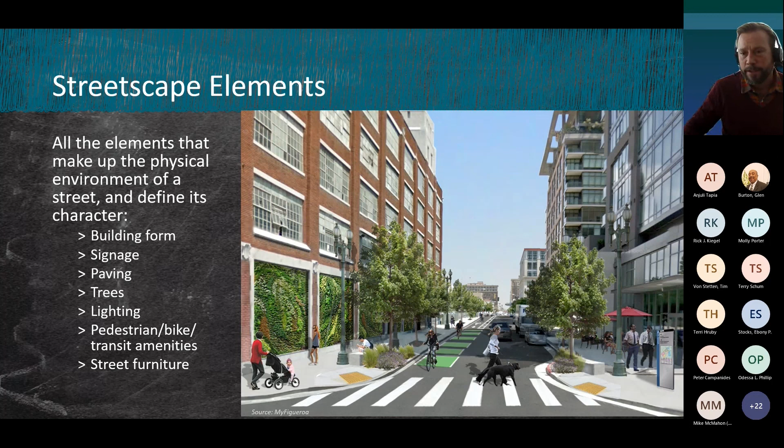Now I'm going to wrap up with experimental and demonstration projects. Anjali did a good job going through the sections that have interim approval, talking about various improvements that have interim approval. We have a whole resource on that if you ever have questions about the approval status of different NACTO bike treatments or some of the newer crosswalk treatments, like pedestrian hybrid beacons and the like. We have an entire document that's pretty useful on that, and we'd be happy to share it with folks.

This is a field—transportation design in general—that has evolved, and so there is a need for flexibility, a need to continue to experiment and try different things. There is a formal approval process in place, but my experience is that many agencies choose not to actually undergo it. So many of the pictures I'll show you later, the agency either decided not to undergo the formal process because they deemed it wasn't really a new traffic control device worthy of experimentation, or in some cases agencies just deemed the process to follow national and state practices too onerous.

They don't have the resources to do that, and I'll show you the graph on that in a moment. One of the keys anytime you're experimenting with new things is making sure you have a really good paper trail, and that paper trail should include collaboration with anybody who might be a stakeholder, particularly within your agency. So if you're going to try something new, make sure you have a strong rationale for why you think it's worth trying, preferably with consensus amongst your engineering, planning, and enforcement staff that it's worthy of experimentation and worth taking on the risk. Having that paper trail can really help if something unfortunate happens and you're trying to justify in a legal case why you did that thing.

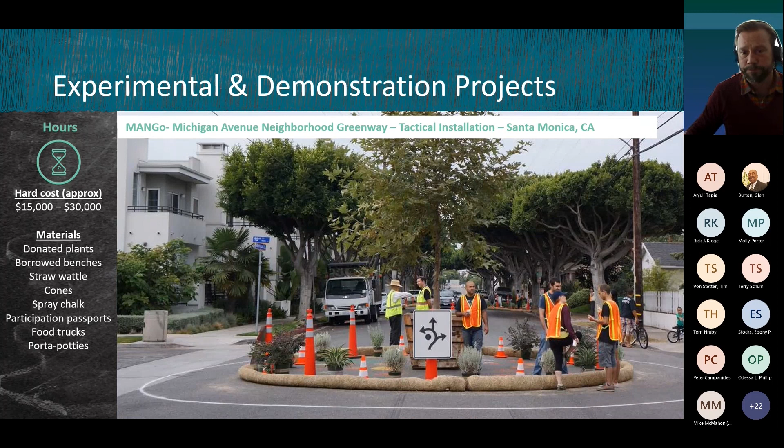Many agencies also experiment with signs, usually paired with some sort of community survey or survey of users to see if it was helpful. This includes wayfinding signage or education signs around appropriate ways to behave while walking, riding, or driving. There's lots of experimentation with low-cost signs.

And then the mother of demonstration projects, on the next slide. Many of you are aware that under Janette Sadik-Khan, the New York Department of Transportation went through and did a host of really aggressive pedestrian plazas, including Times Square, where they used essentially permanent building materials, but low-cost permanent building materials.

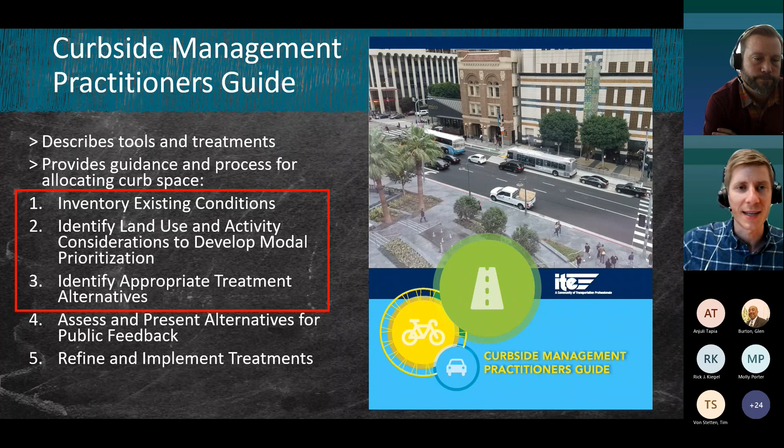It gives guidance on a process for making decisions about allocating curb space. I'll touch on the first three elements; the last two are also important—assessing and sharing those alternatives with the public for feedback, modification, and iteration, then refining and implementing the treatments. The first three are: taking an inventory of existing conditions of the curb, identifying the context in which that curb is located, and selecting treatment alternatives.

On inventorying existing conditions, I want to call attention to another report we worked on with Uber in San Francisco—a detailed inventory of curb use in, I think, four different locations in San Francisco, and we've since done a similar study in Cincinnati. It's important to think about what policies, bylaws, and codes are in place in the location.

The core of the work that we did in San Francisco was thinking about the supply, demand, and utilization of the curb, how that curb space was designated and how use was restricted, and then thinking about the needs and opportunities for that space.

One of the key metrics that came out of that work was this notion of curb productivity. We observed the use of the curb over a period of time and divided the curb lane up into units of parking space, then observed that over time. So the space hour was our unit of analysis, and we looked at how many passengers a section of curb over a space hour could serve.

So while that one parked car might be sitting there for several hours and only serving one person, a shuttle or taxi could be doing more than 100 times as much to serve travelers in that location. This is an important example of inventorying what's currently taking place at the curb and how those uses are interacting.

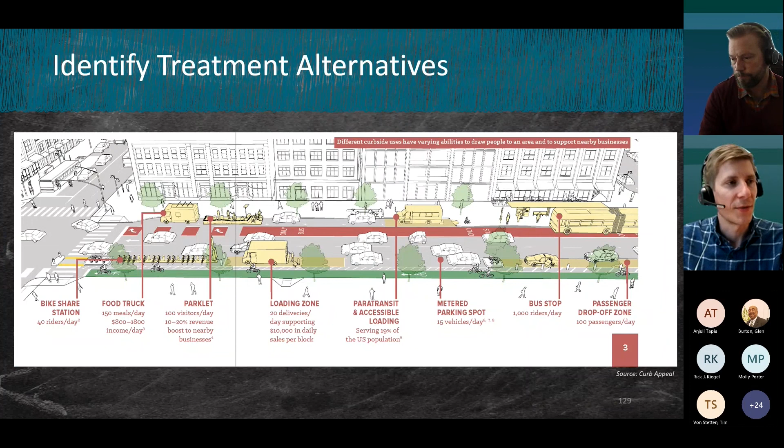Finally, this is from a NACTO document, Curb Appeal, which was even the precursor to the ITE Curbside Practitioner's Guide, and has since been subsumed into it. This graphic identifies a variety of different alternative treatments, and the San Francisco Uber curb study I showed earlier also has a lot of treatment examples for handling loading, pickup, and drop-off parameters, and how to reallocate the curb for smoother use.